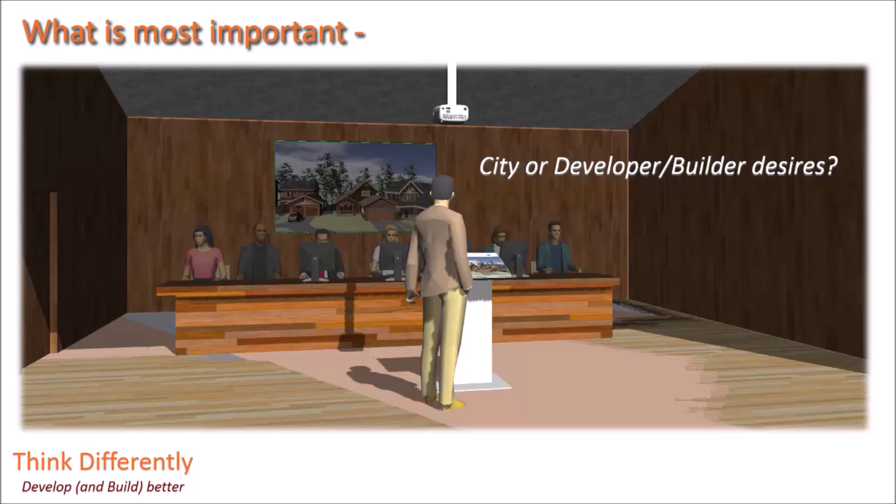So let's talk about the process of development. We start with the farmer or rancher that has the piece of land. A developer wants to develop it, so they're going to contract with that rancher or farmer. That developer is going to go to either a civil engineer or an architect acting as a land planner to design a subdivision or development or commercial center on that piece of land.

That consultant will look at the regulations that are in place, and his job is to squeeze every meter or square foot out of that piece of land and convince the city and the public that this meets the city regulations, and that's how the land is subdivided. That is the process of development. It varies a little bit in the U.S. That process to convince the city to develop has to go through public presentations. In other nations, if it meets the regulations, it just gets approved. But basically, that's the process worldwide.

So, what we're looking at is the elements that are on the right side of the screen as we're talking about what changes we can do. So, every city has a series of regulations. In the U.S., every city will have a purpose and intent. Other nations, most of them do have a purpose and intent. This is from Iowa City as an example. There's standard boilerplate wording that could be found in these regulations, and they're pretty much unchanged for about a century, 100 years.

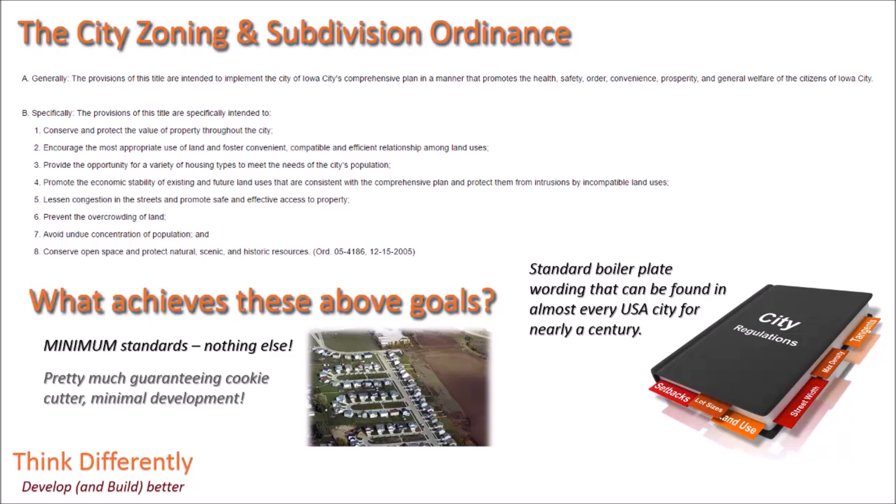What achieves those above goals? Afterwards, there's a set of minimum standards. There's nothing else, which is why you get this monotonous, cookie-cutter, minimal development. That is the way the cities grow. That's the way the world's developed. So who determines these minimums? Well, a lot of them are safety, federal, state, government, national regulations. And a lot of them are based on engineering standards.

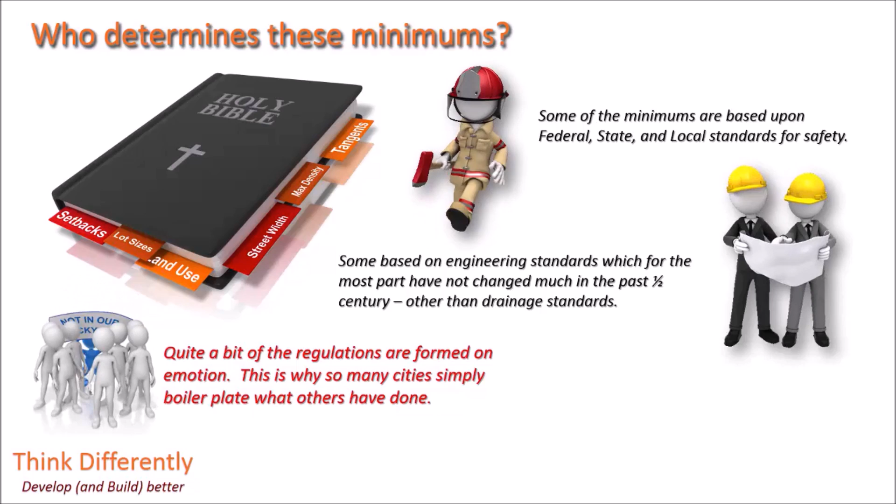In the U.S., the engineering standards have not changed very much since the 1954 Engineering Handbook, with the exception of environmental changes, mostly in the drainage standards. But basically, we're using, in 2017, 1954 standards. But most of the regulations are based on emotion. I don't want lots that small. I don't want to be that close with my neighbor. I don't want to have no yard for my kids to play. I don't want a tower next to my building. Most of it is emotional, and most of it is replicated boilerplate regulations.

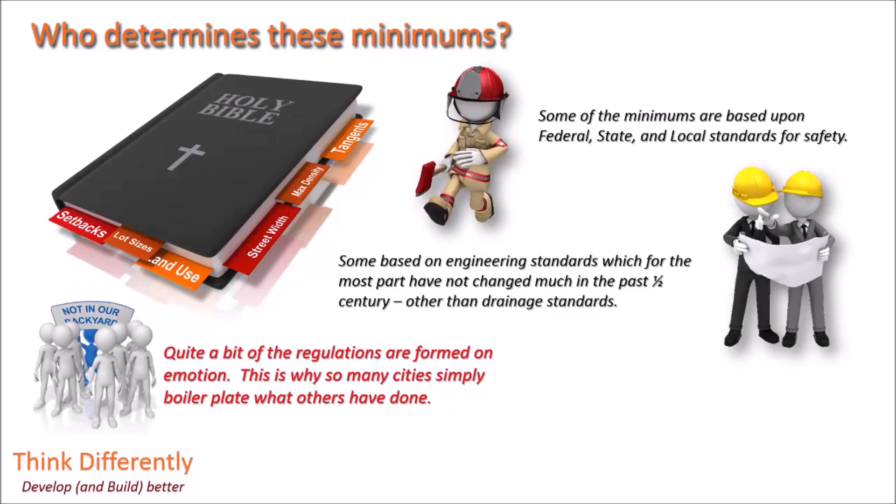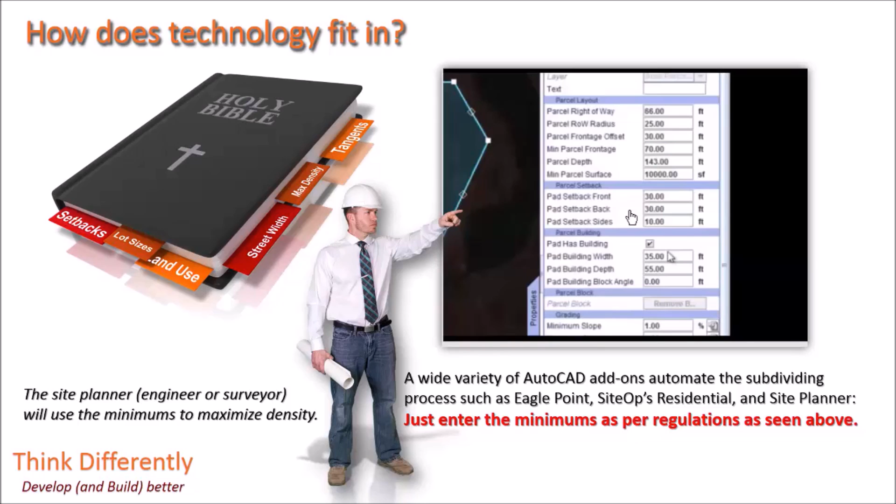So how does technology fit in? And again, we're talking about LandMentor, but most technology simply takes the minimums. This is an example of one of the systems on the market. You put in the minimums on the computer, your building pads, whatever, and those are listed in the regulations. Once you have the minimums in, as you sweep your mouse close to the property lines, they'll snap into the minimums. Now this is sped up double the speed just for convenience. There's various packages that do about the same thing, but essentially in 2 minutes or 120 seconds, there's a 162 lot subdivision that will be designed to the regulatory minimums.

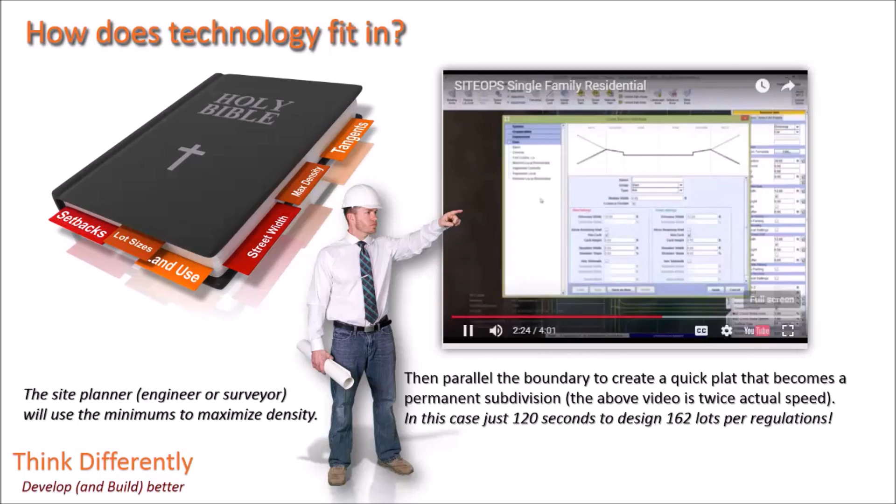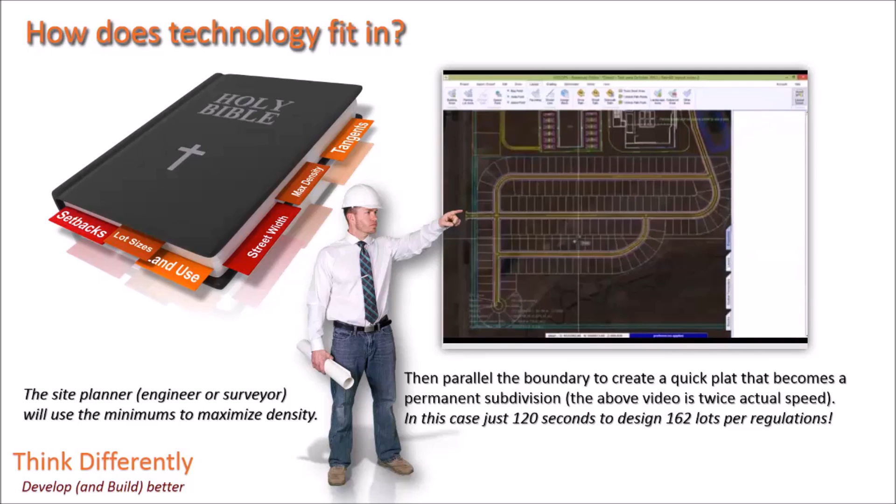If it's designed to the regulatory minimums, if it's outside the U.S. and doesn't have to have public scrutiny, you put a stamp on it and you build it. In the United States, the process will still have to go through all the public scrutinies, and maybe in a month or two, or maybe with environmental concerns in 4 or 5 years, it will be a development. But it will get approved. Why? Because it meets the minimum.

So assuming on those lots a family's going to move in, let's assume 3.5 people. A home sells on average in the U.S. once every 6 years. And so in a century, that home will be sold roughly 17 times in 100 years, or 16.666 for rounding out numbers. So 162 lots times 3.5 people will initially house around 570 people, 570, 600.

Now, in that 120 seconds. So again, a home sells 17 times in a century. So rounded off, it will affect the living standards of 10,000 people. So the time to design per lot was 3/4 second per family, or time to design per person in that century is 0.01 second per person who will live in that project. And again, it will get built like it's shown because it meets the standards.

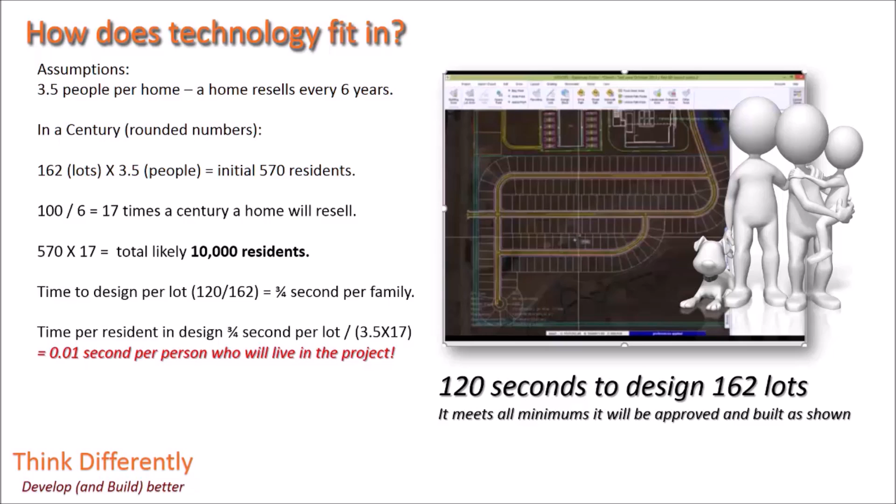That's how technology fits in. That's what we have done with technology today. There was no time to think about curb appeal, premium views, reduction of monotony. How are you going to walk about the neighborhood? Who cares? You just simply followed the streets. Environmental impact. Who cares? Profits? The developer said, well, I got my units on that side. I got 162 units. I am making a profit.

Not necessarily, because it's not a great place to live. And that devalues the development costs. But there was no attention on the efficiency of the design. And that's the problem. Maintenance headache. If it's not efficient, the city has got all those public streets they're going to have to maintain forever. Or if those are private streets, guess what? The homeowner's cost goes forever. Who cares about safety? 120 seconds. That's how technology fits in.

And that's where we're going to change your education to start thinking about these things and make you a better planner, better architect, better designer, better surveyor, better engineer, better real estate person, better construction management, and that's where all of this fits in. So, technology doesn't fit in very well. With the LandMentor system, it changes all of that because we will change and have you think differently in these processes. And these are the processes that your career is going to take you.

So the first lesson is how to recognize waste. Now, in the LandMentor system that we hope you will download and review and learn and go through all the documentation, this is just one lesson. Where's the waste in this plan? And it's not in the cul-de-sac. Take a few seconds to look at it, and it should instantly impact you why this plan is so wasteful. And again, it's not in the cul-de-sac. And this plan was created by an engineer, went to a developer, went to a city, and nobody recognized the waste.

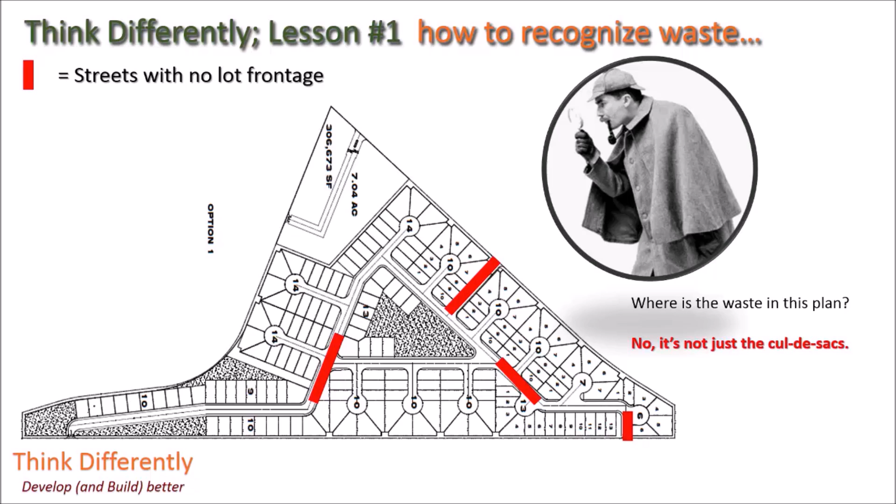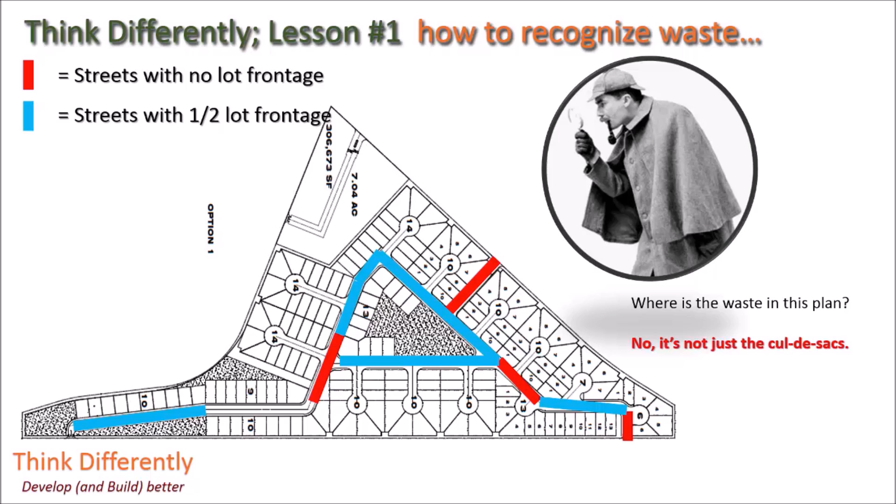Okay? The red streets have no frontage. So a street that has no frontage is 100% waste. If you're not fronting a street, you're not gaining a use of the street. The street is being built for no reason once you enter the neighborhood. These blue streets are half fronted. So that means only half of the street is being utilized for value. So then you add the waste in the cul-de-sac. In this plan, there is no cul-de-sacs.

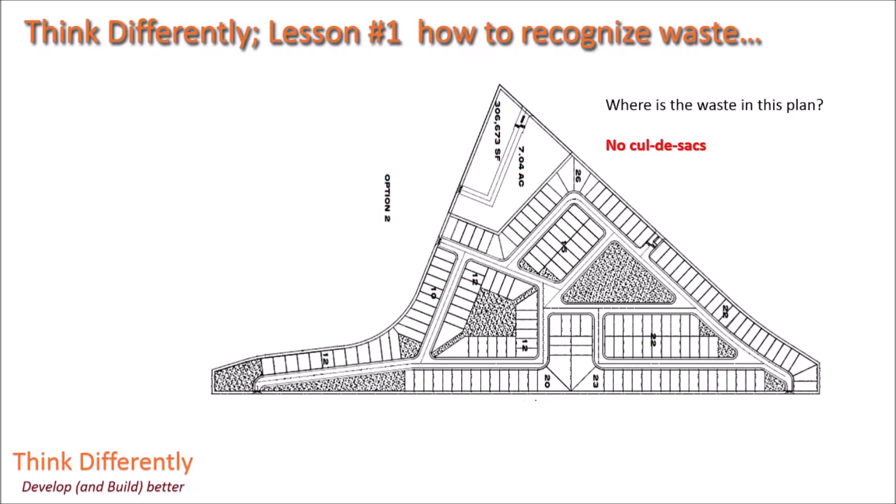Where's the waste in this plan? Take a second. Well, there's hardly any red streets, so it's pretty efficient, but wait a second. Those gray streets are the only streets that are efficient. Everything else that's not filled in is 50% waste. So what happens is all of that street is waste. So both of these plans, one had about 1/3 of the streets being in the form of waste. This is about half the streets being in the form of waste.

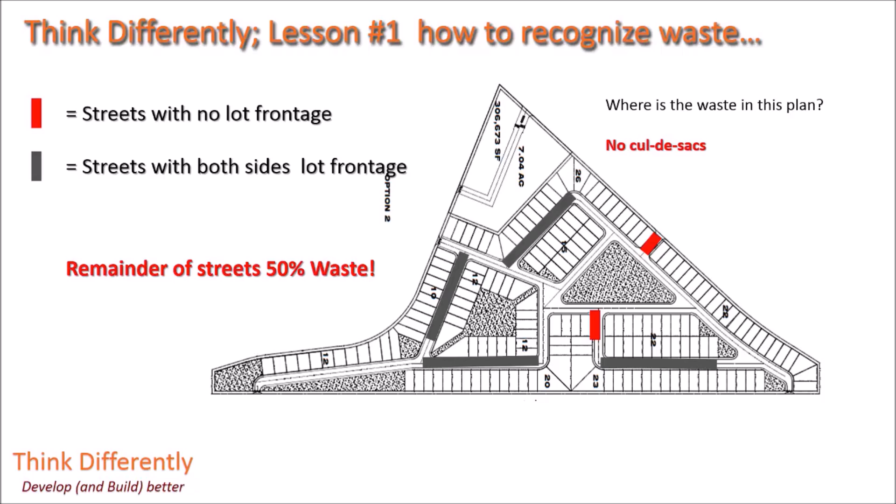So what LandMentor does, when you start reading the documentation, we start going through the classes, this is just a taste of how to think differently, because the world isn't thinking this way. Lesson 2, taking that and how to recognize the waste and how to quantify, report it, and make a difference. Of course, we started out purpose intent. This is Brentwood, California. I don't have to remind you, famous for the OJ murders.

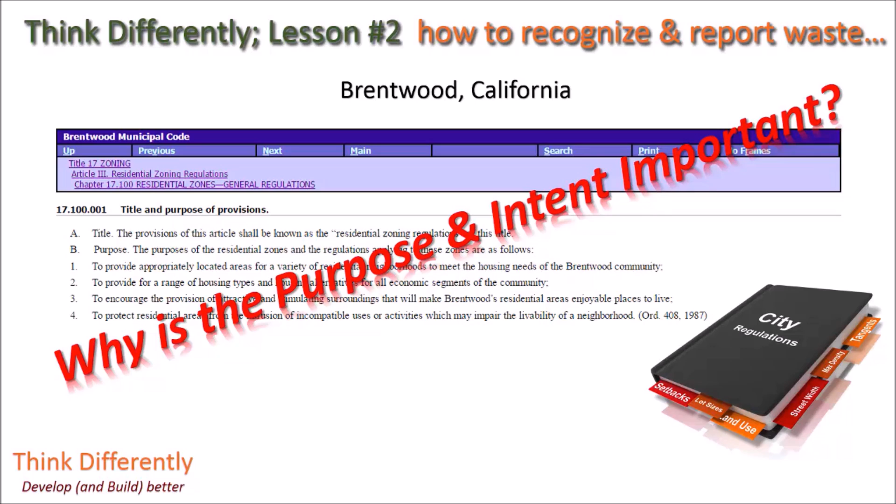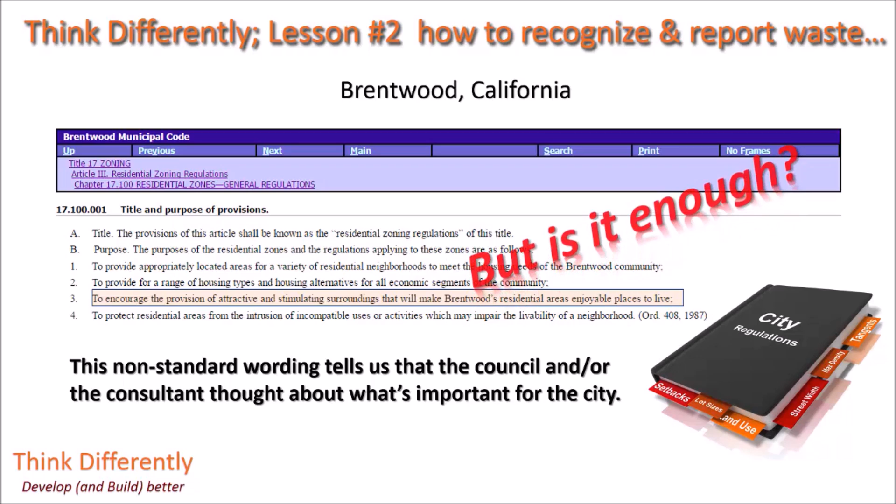Now, again, why is the purpose and intent so important? It's because everything following the purpose and intent is supposed to deliver the purpose and intent's purpose. So, it says something very interesting in Brentwood's purpose and intent. To encourage the provision of attractive and stimulating surroundings that will make Brentwood's residential areas enjoyable places to live. Keep that thought. Non-standard wording that tells us someone thought about their growth. So, is it enough? So let's take a look at a proposal in Brentwood.